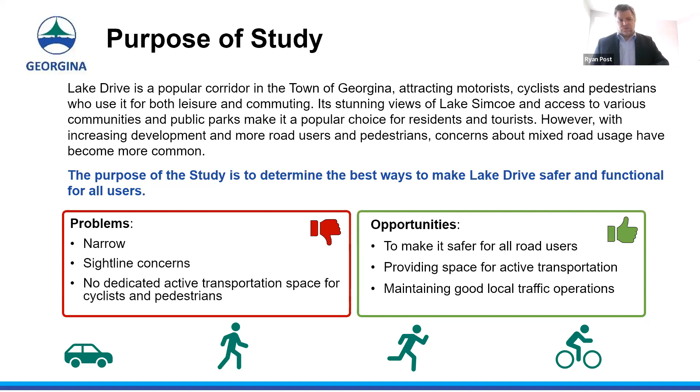Briefly on the study area: this project is looking at the whole of Lake Drive and also Hedge Road, north, south, west, and east. It covers a wide range of land uses and road contexts. There are residential areas, areas adjacent to the shoreline, and public parks through Jackson's Point and Hedge Road. Given the unique characteristics we find driving from north to south and east, the project is divided into three sections grouped on similar road and land use contexts. It's also important to note that we're not just looking at the popular tourist sites and beaches, but the whole corridor. Recognizing that it's not a one-size-fits-all approach, these sections will be looked at independently based on their unique characteristics.

I want to point out quite clearly that this study will focus exclusively on the existing edge-to-edge pavement configuration, and will not require widening or any other additional elements outside the existing paved surface. So just think of that existing pavement context in that area, and not looking at anything outside of it.

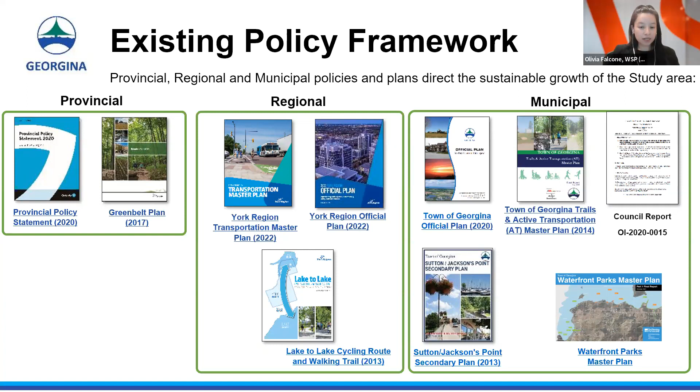By reviewing these documents, we gain a better understanding of the context of the study area and what is being planned in the future.

I will now pass it on to my colleague, Helya, who will talk about best practices.

Thanks so much, Olivia. So we want to talk about best practices and how we want to integrate those best practices in this project. As part of the best practices, we're looking at complete streets and Vision Zero best practice design guides.

For the complete streets design guide, we're looking at the shift from the traditional approach to road design, where we're primarily focusing on motor vehicles. With complete streets, we're looking at an approach that equitably considers the needs of all road users, and we recognize the importance of streets, not looking at streets only as channels of transportation and mobility, depending on their context.

We're also looking at streets as a significant element of the public realm. For this project specifically, we're going to use complete streets design guides as a general guideline for improving safety and user experience. We'll look at the context of each corridor and section of the study area, understanding the speed, traffic, and mobility, making sure we integrate all necessary elements in the design guide.

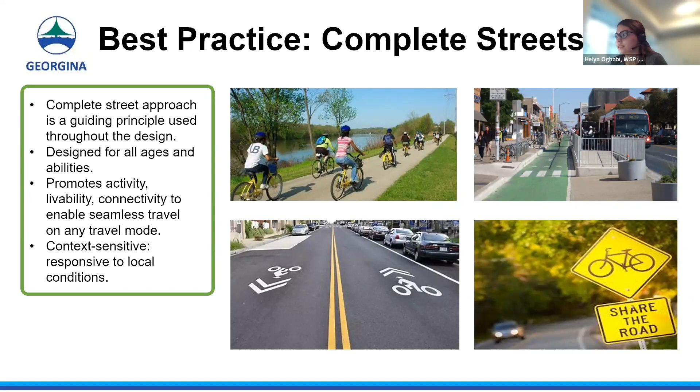The second best practice we are going to integrate in this project is the Vision Zero initiative. A simple and clear goal for Vision Zero is zero fatalities or serious injuries on roadways, creating conditions where no loss of life is seen as an acceptable trade-off for mobility.

We're focusing on design improvements to address safety concerns and account for potential human errors. As part of the Vision Zero initiative, we're going to address safety issues for the most vulnerable users of the road and transportation system, which are pedestrians, school children, older adults, and cyclists. We understand that all users and designers have a shared responsibility in preventing accidents.

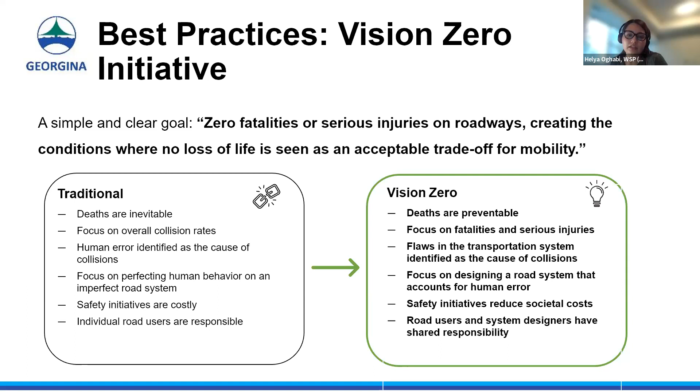So with that, I'll pass it on to Olivia to talk about existing conditions. Thanks, Helya.

The study area for this project is lengthy. As a result, the land use of the roadway changes and varies as you travel from one end of the study area to the other.

Throughout the study area, there are accesses to Lake Simcoe, waterfront parks, and amenities. The roadway typology varies between rural and suburban depending on where you are in the study area, and there are generally residential properties along the roadway, although there are also some commercial properties that front onto Lake Drive and Hedge Road, such as in Jackson's Point.

Lake Drive Road is designated as a local road under the town's official plan. Local roads are designed to serve residential neighborhoods and other non-major traffic generating areas, provide land access to abutting properties, and have a right-of-way width of 20 meters.

Metro Road, which is a regional road, parallels Lake Drive through the whole study area, as well as the Queensway and Black River Road. In terms of the general roadway condition, oftentimes along the study area, the right-of-way width seems much narrower than 20 meters.

The image on the bottom of the slide shows the roadway where the pavement is approximately 7 meters in width, with hedges on either side that obstruct the view down the road. This severely reduces stopping sight distances of vehicles, which should generally be between 50 meters to 65 meters.

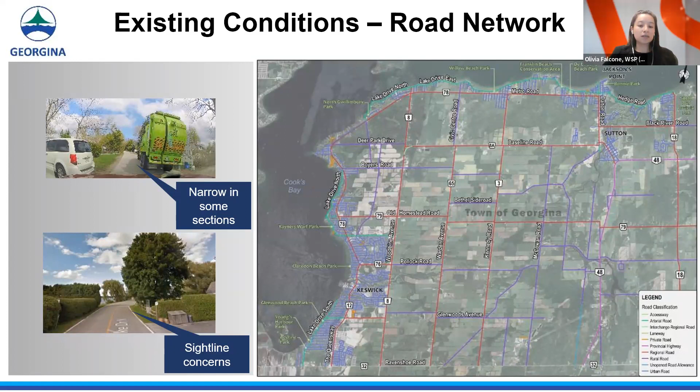Previous public and stakeholder input provided as part of the Trails and Active Transportation Master Plan have indicated a strong demand and priority for a formal pedestrian and cycling facility along Lake Drive, particularly during the peak summer months. As a result of that master plan, 2 design options were put forward for consideration.

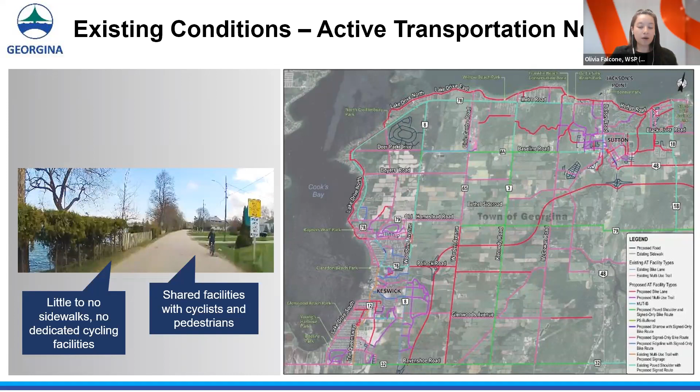These are: convert part of Lake Drive from a 2-way to a 1-way road for motorists from June through to October, and convert the extra lane into a separated pedestrian and cycling facility on the side that abuts Lake Simcoe. This is also coupled with reducing speed limits along the segment and implementing sharrows to indicate shared space between cyclists and motorists. So those are the 2 options put forward for further consideration.

Lake Drive travels through different communities within the town, and a one-size-fits-all approach would not work here because we have to look more contextually and more localized at each section. As such, the study area has been divided into 3 sections, based on their character and context. Now we're going to go into a bit more detail on each section.

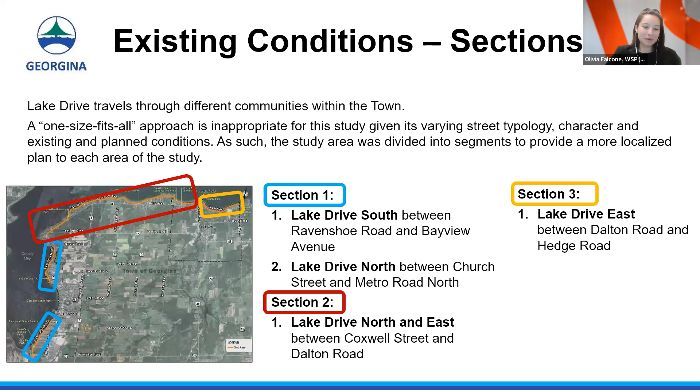To go through each section: Section 1 is located in wards 1 and 3 and runs through Keswick.

In this section, Lake Drive is mainly residential on both sides, where lakefront properties are fully on the lake side. There's limited beachfront and/or parks here, but there are some accesses to boat launch sites and marinas. There are some sections of Lake Drive where it is hilly, but overall this sees less seasonal tourism traffic.

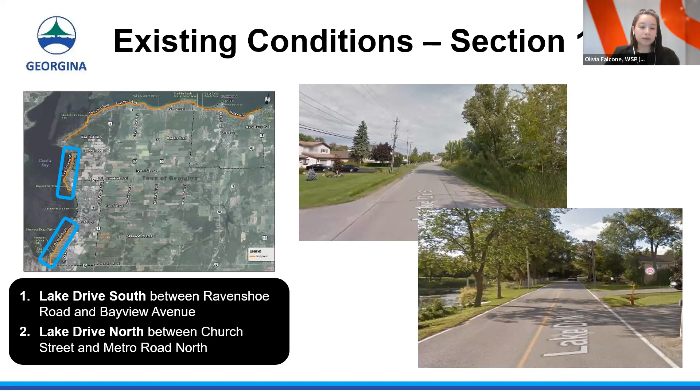Section 2 extends from along Ward 3 into Ward 4 and generally has residential properties on the south side and beachfront on the north side, though there are a few sections with lakefront properties on the north side of Lake Drive. The terrain here is generally flat but very curvy with limited sightlines. There is also access to high traffic beaches and public parks in this area, with the most popular being De La Salle and Willow Beach. So this section sees a much higher number of seasonal tourism and seasonal traffic.

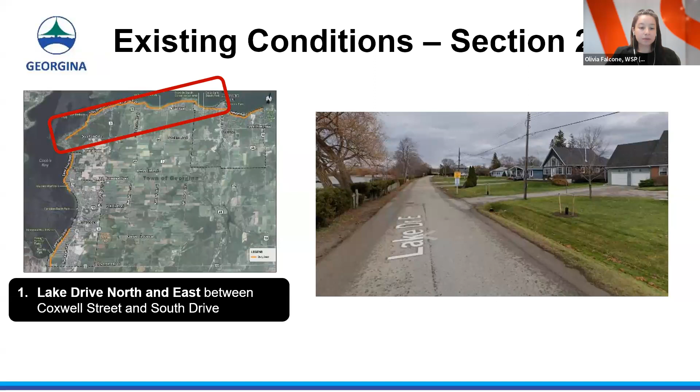Finally, section 3 is all within Ward 4. In this section, Lake Drive extends through Jackson's Point, which is one of the only areas with a sidewalk. It transitions to Hedge Road, which has property access from both north and south sides, or private beaches on the north side. This is also where there's access to Briars Resort and Golf Club, as well as Sibbald Point.

There is a narrow bridge over Black River along the stretch, where it goes down to one lane of traffic, so only one vehicle can pass the bridge at a time. The roadway typology in this section is reasonably flat and maintains a straight terrain.

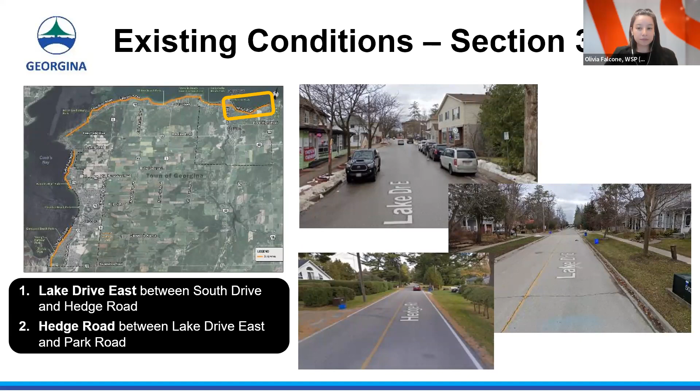Okay, so in this section we want to talk about potential elements of alternatives that the project team identified and how these elements can be grouped together to introduce a different future for Lake Drive and Hedge Road.

Based on the problems and opportunities identified in the first few phases of the project, we tried to identify potential alternatives that would functionally fit within the existing right-of-way, trying to improve the status quo of the road and transportation system. We grouped the alternatives into 3 groups: lane arrangements, active transportation, and traffic calming and safety.

The ultimate goal for these alternatives is to first make sure they're practical for the existing right-of-way, and then to make sure we are providing a safer, more functional and livable place for all residents and road users. These alternatives do not include any element outside the existing right-of-way, and we try to group them as shown in the next slides. We'll go through them in more detail.

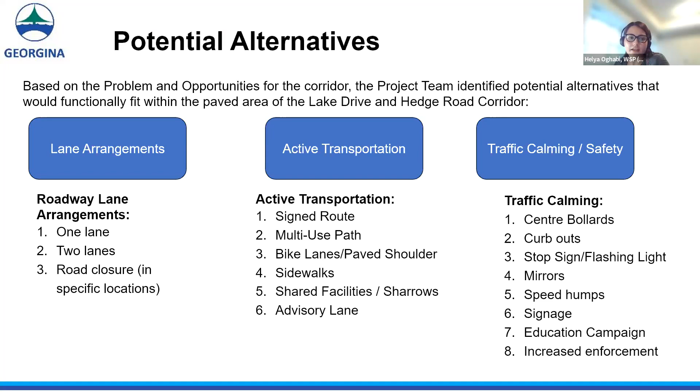So for the first group, we want to go through the lane arrangements, starting from the top left corner. We have the do-nothing option, which means 2-lane vehicle traffic throughout the study area. The next one is a one-way option, which can be coupled with other active transportation alternatives. We also have alternating one-way, road closure, and advisory lane.

So what are advisory lanes? Advisory lanes are defined as a preferred space for cyclists and motorists to operate on a narrow street that would otherwise be shared as a shared roadway. Roads with advisory bike lanes accommodate and provide a prioritized space for cyclists with almost little widening of the paved roadway surface.

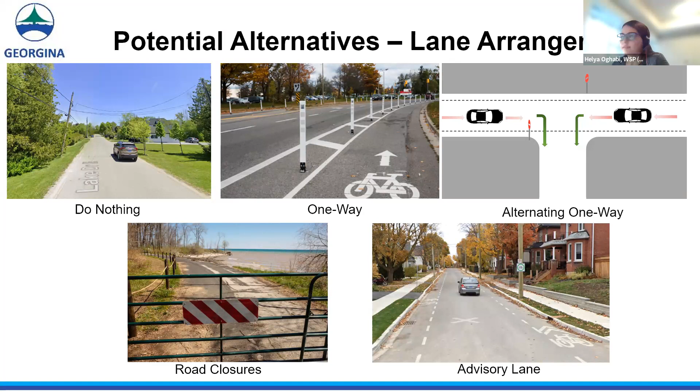Next slide, please. The next group of potential alternatives are active transportation alternatives that can be coupled with mostly one-way vehicle traffic, but they can also fit in with two-lane vehicle traffic.

Starting from the top, we have the do-nothing option, which is basically the signed route, keeping the status quo. The next option is multi-use pathways, which can be used by cyclists and pedestrians, and are typically shared roadways between these two road users. We then have paved shoulders, bike lanes, sidewalks, shared roads or sharrows, and advisory lanes as described. These active transportation alternatives aim to provide a safer and more welcoming space for pedestrians and cyclists.

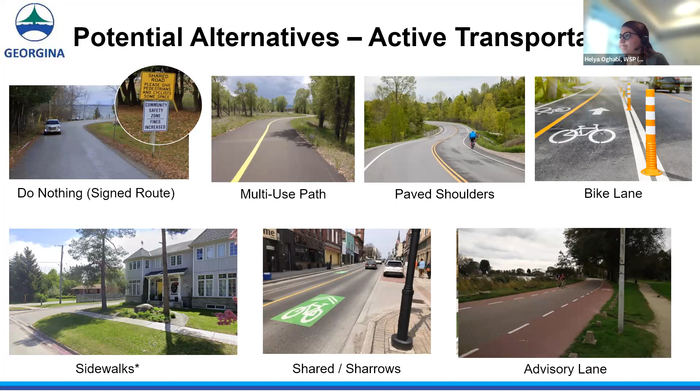Just to note, the sidewalk option is basically a do-nothing option. The existing sidewalks would be kept on the existing right-of-way, but we're not adding any more sidewalks. Next slide, please. Thank you.

The last group of potential alternatives are traffic calming and safety measures. These are a combination of mostly physical features intended to improve traffic use on local collector streets, alter driver behavior, and improve safety conditions for everyone who uses the street. These are a demonstration of some of the traffic calming measures we are considering for the sections of Lake Drive and Hedge Road.

These include centerline bollards, temporary curb extensions, flashing lights, restriction traffic signs for local traffic only, educational campaigns, mirrors, temporary or permanent speed humps depending on the context of the road, signage, and increased enforcement.

So in the next two slides, what we did was try to show how a combination of these groups of alternatives could look like for the future of Lake Drive. Next slide, please.

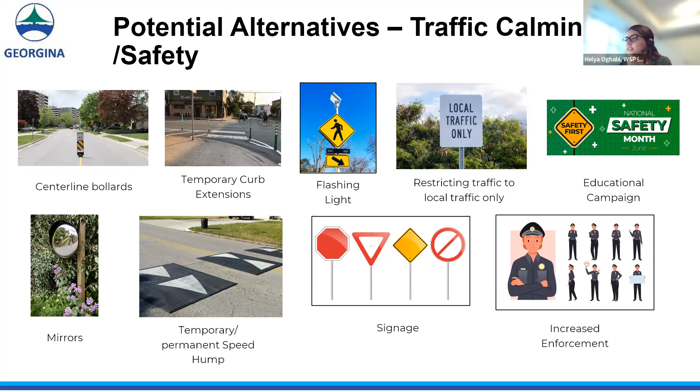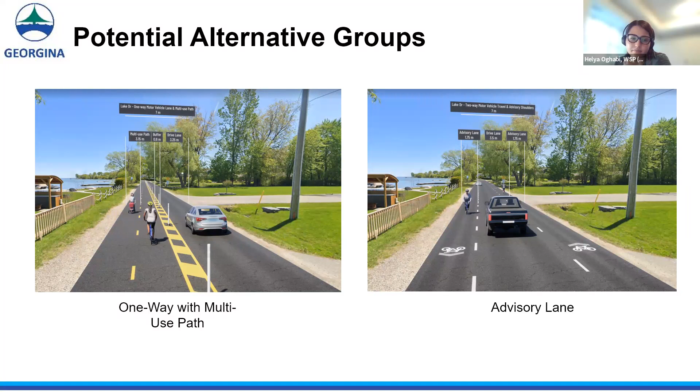Next slide, please. The second group of potential alternatives are two-way vehicle traffic with sharrows or signed route, and the last one is one-way vehicle traffic with paved shoulders. Sharrows are basically shared lanes, usually intended for the usage of cyclists and motorists, so they can be shared between both users. We show sharrows here, although with two-way vehicle traffic, because sharrows draw awareness to motorists that there are likely to be more cyclists around them, and they need to drive with more caution.

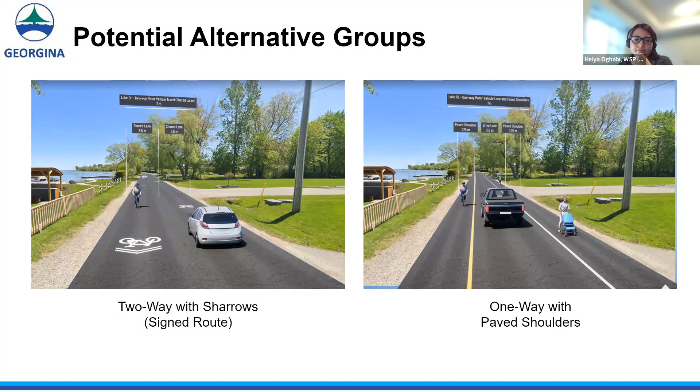So I pass it back to Olivia to explain the assessment methodology.

Thanks, Helya. So we've shared a lot of different options. There are a lot of alternatives under lane arrangements, active transportation, and traffic calming. Let's break down the assessment methodology and how we're going to carry out the assessment of the alternatives by section. The first step is to identify all the potential alternatives.

We've done this with the lane arrangements, active transportation, and traffic calming. Next, we're going to group the alternatives into cross sections, like you've seen, based on their functionality and whether or not they fit into the existing paved roadway, and their appropriateness for each section of the study area. Following that, we are going to evaluate the groups against environmental impacts - socioeconomic impacts, transportation and safety, natural and cultural heritage impacts, and cost.

Then finally, we're going to select a preferred alternative for each section. This is when we're going to come back to the public in the fall with a public open house, and we'll present the assessment, the evaluation, the technically preferred alternative for each section, and solicit feedback from the public to see what you think.

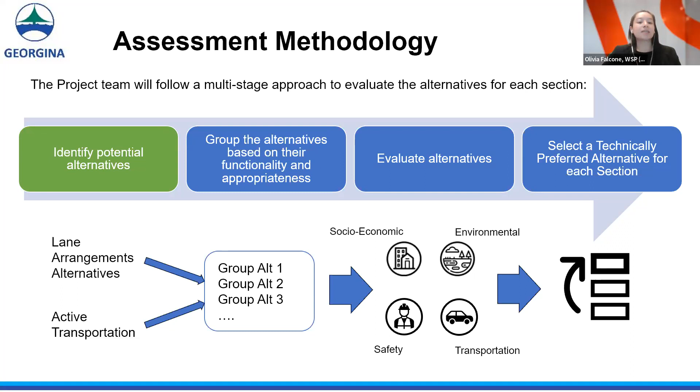All right, so I'm going to pass it to Helya for the discussion. Awesome, thank you so much. So for this part...

The ultimate goal for having this workshop was to hear from all of you. Thank you so much for joining this session. This is very important for the project team to hear from the residents, road users, and whoever joined the call today.

As part of this, we want to go over different sections of the study area, and honestly, we want to just hear from you to see what you think about the potential opportunities for improvements, what you perceive as issues. So if you can please go to slide number 6, Olivia, so that people can see the map.

It would be great. Ellie, I have a quick question. For sure, yeah - for the discussion, the Q&A, do we want to stop recording? Yeah, we can stop recording, Ryan, and then that way if folks want to unmute, you can just use the raise hand function, and we can unmute you, and you can just kind of let us know what you think. You can use the chat, you can use the Q&A function, and then we can zoom in on any particular portion of the corridor for you as well, and we can kind of make notes about any of the elements that you're wanting us to note on.